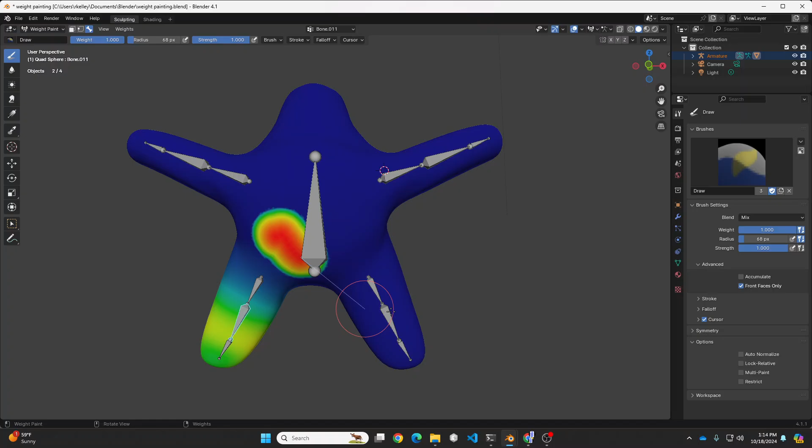And if I grab this part, this middle joint here, and rotate it, not bad, but I've got a little bit of movement in this area that I really don't want. So one thing I can do to change that is grab the brush here, and I could draw. And now while drawing, apparently I've got stroke smoothing turned on. Let me go up here to stroke, stabilize stroke, turn that off. I can draw, and I can add some influence. So now when I move the bone, everything I just drew on moves.

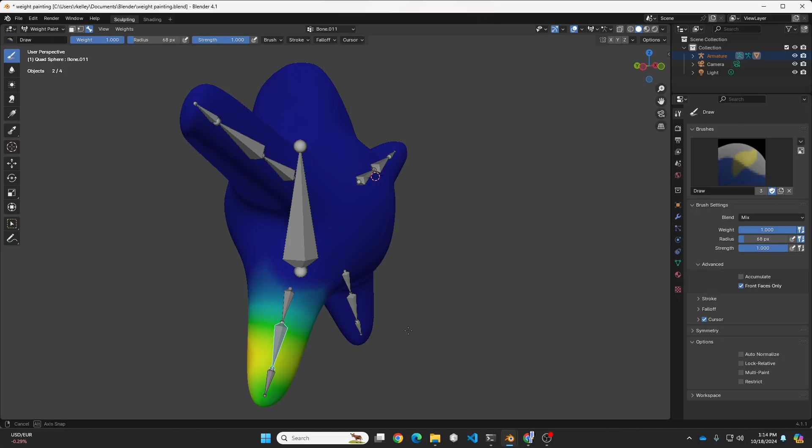Let me go ahead and undo that. And what I want to do is get rid of some of the influence up here. So you can hold down Control, just like sculpting, and you can kind of reverse draw. And I can get rid of some of the influence I don't want, some things that I don't want moving. And then I'm just going to press R and try wiggling the leg, and that looks more reasonable. I could work with that.

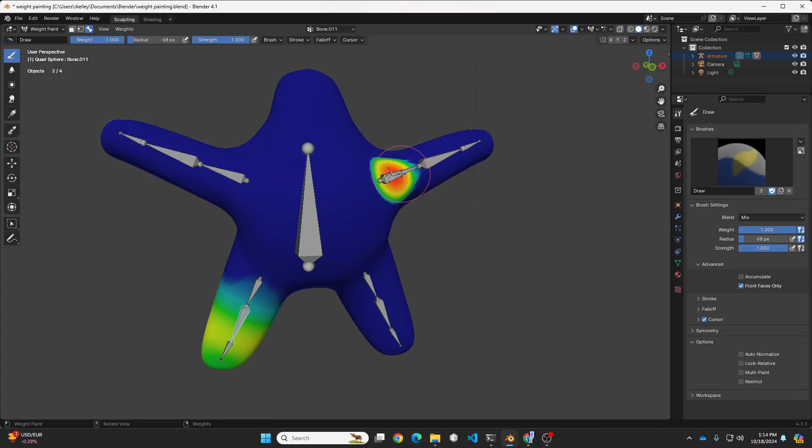If I want to look up here at the arm, I tried clicking on the bone right there and notice I didn't get it. So when you're inside these tools, it can be a little difficult to grab the bones. You can do a key combo for that. So if I hold down Control and Shift, I can now click a bone. Whoa. And I didn't miss. Okay, I thought I missed.

That bone has a lot of influence. There's a lot coming out into the rest of this. So I really want a bigger brush. And I'm going to hold down Control and just kill large swaths of this. That bone should not be moving that much of the body. Rotate and come around and do this on the back. This is a quick video.

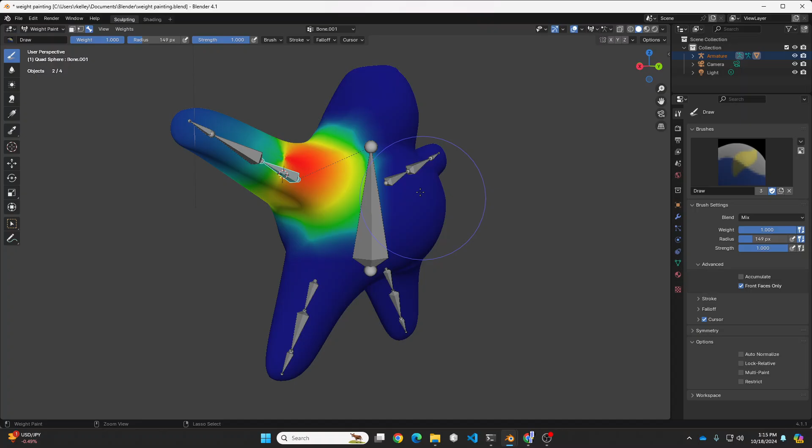I am not going into specifics about how to do this symmetrically or how to do front and back at the same time or anything like that. I have now created more of a border around the area that I don't want to influence. I'm going to come into the neck a little bit more here.

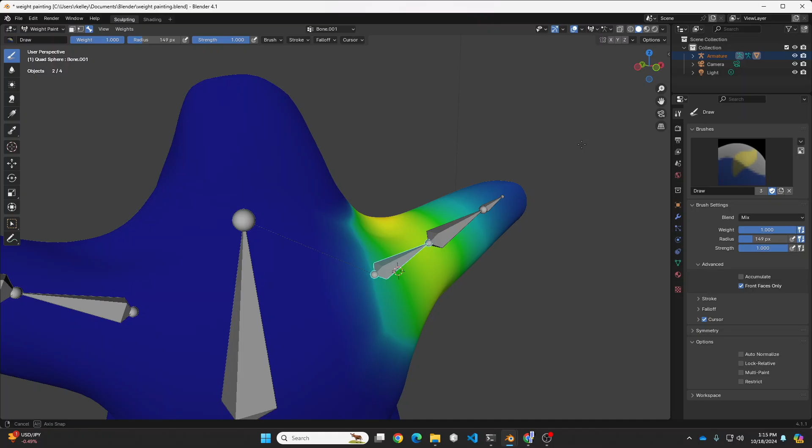Now, what I really don't want is a very hard transition area. So in addition to the draw tool, there is a blur tool, and it seems to work with each click. It doesn't work so much with dragging and scrubbing. So you can click a little bit and kind of smooth that out. You can see how that's smoothing out with every click.

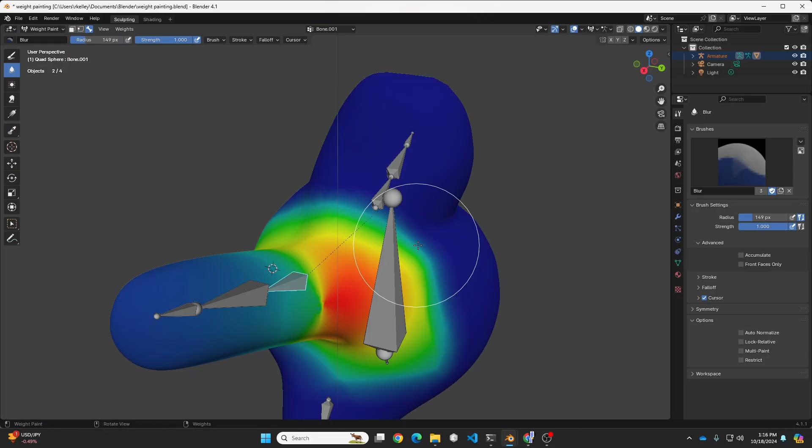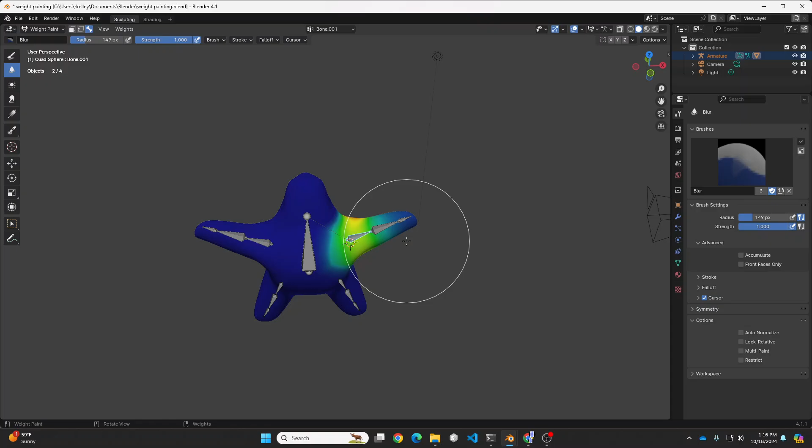And with that bone selected already, I'm just going to press R and see how much is moving with it. Yeah, that's potentially pretty good. Let's move it, get out here. All right. Let's check this other bone. I'm going to control shift click it and just give it a rotate, a test rotate.

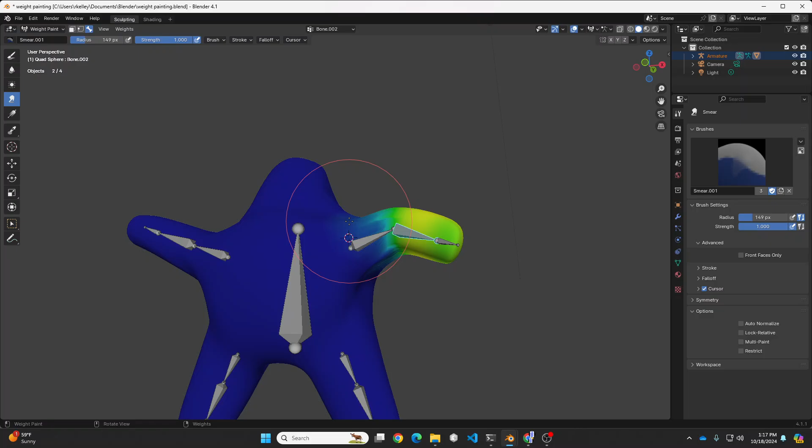Not bad. We're getting a little bit of movement at the elbow, which is causing some part of the body to move. That feels like that should not be happening. So I'll do a little control painting. Actually, you know what? This time around, I'm going to use a different tool. I'm going to use the smear tool and just sort of pull those colors back. So I'm pulling them away back toward that arm. And I'll do it that way.

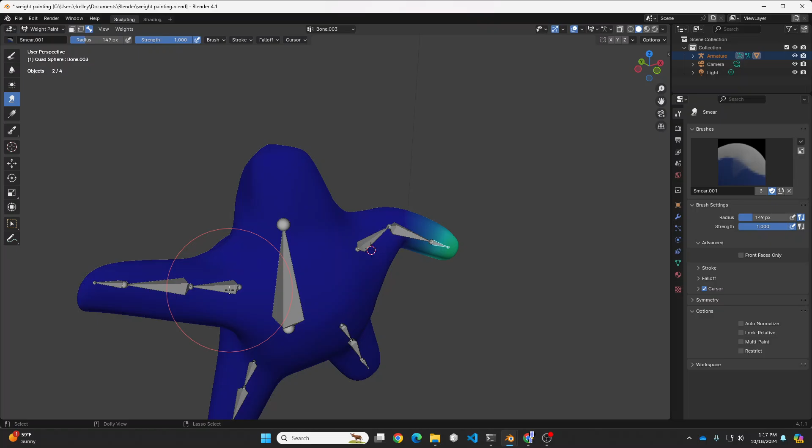Now I'll just give it a little test rotate again. Okay, that bone seems to be mostly influencing that end of the arm. I'm going to shift control click this bone. That bone looks fine initially. I'll shift control click this bone. That's got the same problems that the other one did. I could go through and clean it up in a similar fashion.

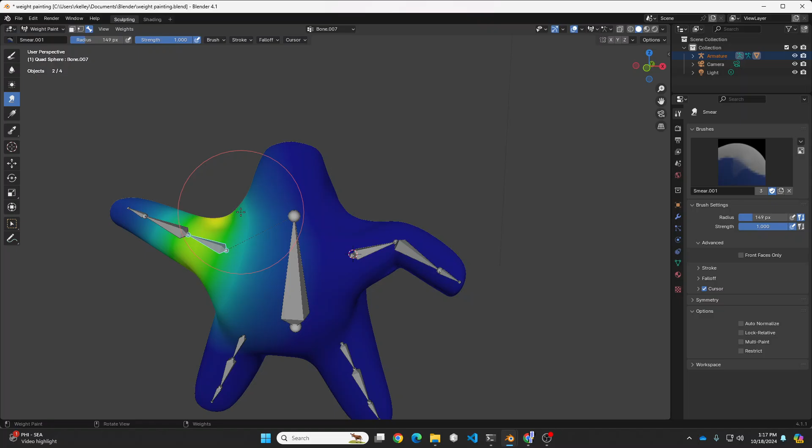And so that's the quick and dirty of an armature and a sculpted shape and how those things are going to interact. There's a lot more available on YouTube about how to weight paint perfectly and how to sculpt so that your weight painting works a little bit more effectively. Because remember, your mesh can only bend where there are vertices and edges for it to bend on. And so if you don't have vertices and edges in this area where you want some bending to happen, then your sculpture is not going to bend that way.

So you might have to go back and actually tweak your model a little bit to get things like this to work properly. But that's it. So now I can make this basic figure walk, dance, jump, what have you. And it would look reasonably well. And I would probably need to do some more detailed modeling if I want it to look better. But that's it.

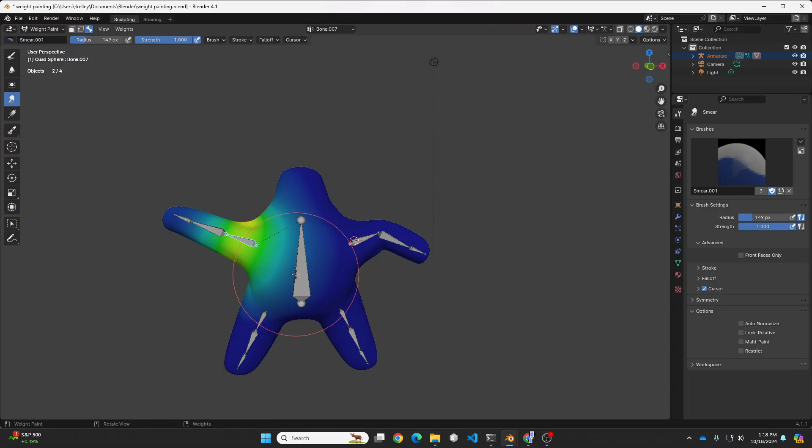So, quick refresher. How do you get to weight painting? Pick your armature, shift click your object. Now you have weight painting as an option. Once you're in weight painting, how do you pick a bone? Shift, control, click, grab that bone, and now you can do some weight painting with that bone. You've got your three main tools over here, which are draw, blur, smear. I don't use average very much.

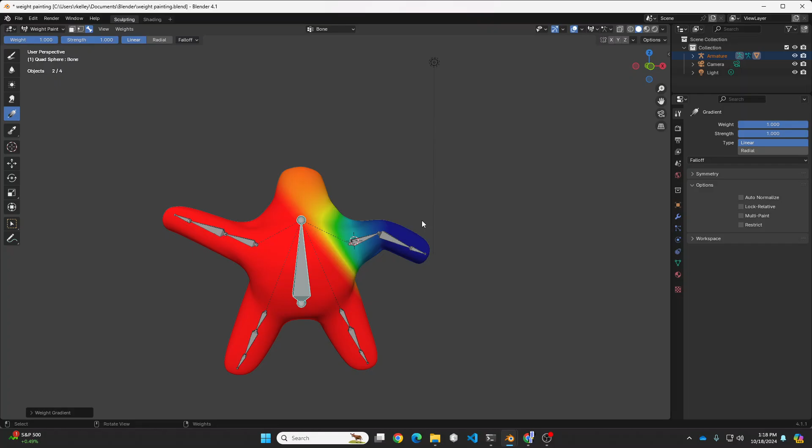You can use gradient, but gradient tends to be a little bit more extreme. So it starts off with full red on one side and then yellow out to green and blue. But you always get full red on one side, and it goes all the way through. So use gradient with caution, even though it's a very large tool for big areas.

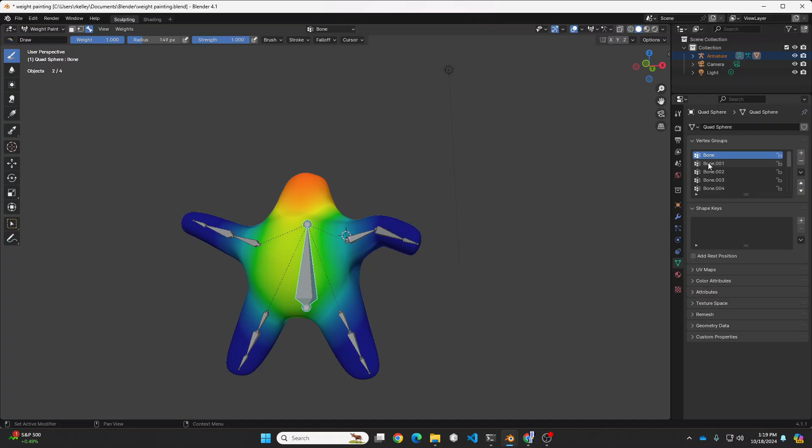The other way to select your bones is you can always get a list of bones over here. I went to the little data tab, and each bone is listed. If I had gone through the trouble while creating this to actually name the bones, I could quickly grab different bones over here and start weight painting with those too. So there you go. That's a quick and dirty weight painting on a sculpture kind of thing.